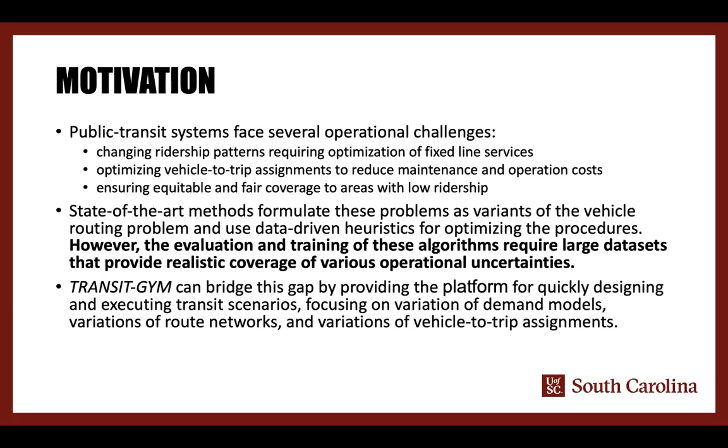We need the ability to design different demand scenarios and test the algorithms against changing demand and traffic patterns. However, there are several challenges. Scenario specification is one of the challenges we face. Different transit scenarios, such as different demand models, route networks, and vehicle-to-trip assignments should be designed in our platform so as to provide realistic coverage of various operational uncertainty for testing algorithms.

How to specify these scenarios in our platform and allow users to select and execute easily and automatically is the problem we focused on. To handle this problem, first, an integrated, highly scalable cloud backend for various transit scenarios is needed. Second, a domain-specific modeling language is used to create domain-specific models representing different scenarios.

Another challenge is the calibration of simulation models. For the simulator to remain viable, it is crucial to keep the physical transit network of the city and the simulated transit network in sync. It is common for developers and researchers to retrieve network files from existing platforms such as OpenStreetMap. The data available on these platforms is traditionally crowdsourced, and in many cases, it is not up to date with the actual transportation infrastructure.

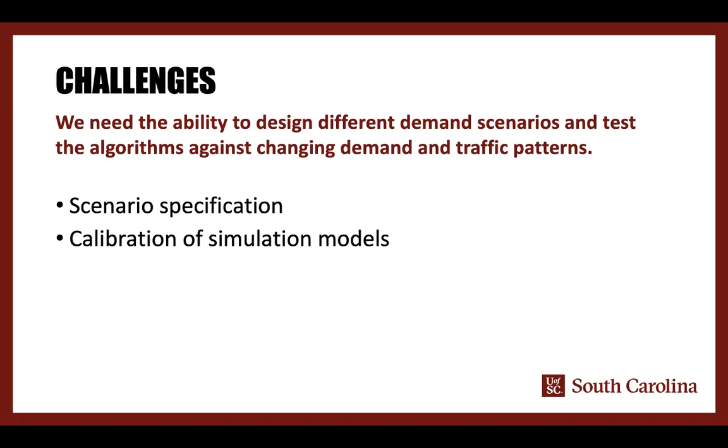The central contribution of this work is a domain-specific language and associated experimentation toolchain and infrastructure to enable subject matter experts to intuitively specify, simulate, and analyze large-scale transit scenarios and their parametric variations. The key contributions include a novel domain-specific language that allows intuitive specification and variation of transit scenarios, a methodology to construct and calibrate street maps that conform to real-world transportation infrastructure,

a toolchain that automatically configures simulations from the scenarios specified using the domain-specific language, and a customized general-purpose simulation for transit scenarios. Of particular significance is an integrated microscopic energy consumption model that also helps to analyze the energy cost of various transit decisions made by the transportation agency of a city.

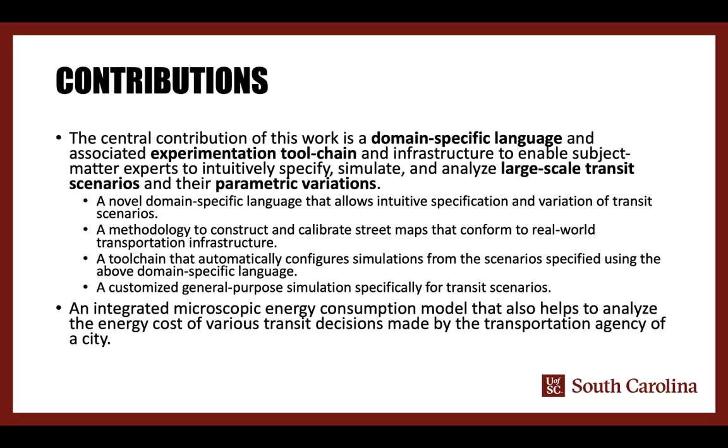This paper lies in the intersection of these techniques: model integrated computing, cyber physical systems wind tunnel, SUMO, and energy estimation models. Model integrated computing is a meta modeling technique that puts models at the center of all applications. It allows the creation of domain-specific modeling languages. In the rest of this presentation, I will call it in short DSML.

The DSML describes the syntax and the semantics of the models, how models can be constructed, and the constraints that the valid models must satisfy. The DSML tools then interpret models to verify them and generate executables.

Cyber physical systems wind tunnel is developed by Vanderbilt. It is a model-based heterogeneous simulation, integration, and experimentation framework. This framework has been successfully used in different application domains such as traffic, security, high fidelity dynamical simulation, and smart grid. We are working on extending Transit Gym using this framework for integrating traffic simulation in SUMO with transportation planning simulation and for large-scale scenario-based experimentation.

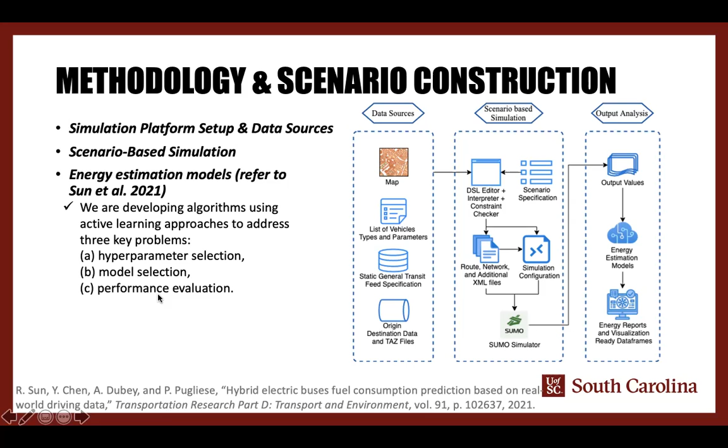This slide introduces the DSML we used in our Transit Gym. This DSML program is separated into the import section and configure section. The first section imports the pre-configured scenario settings that would be used as background data for subsequent code. The import command has 4 variants corresponding to each of the imports. For example, import network configures the map, import vehicle configures the vehicle type, import GTFS configures the GTFS data, and import TD configures transportation demand files. The next section configures one or more simulations based on user input parameters.

Here, first, the time range for the simulation will be specified. The schedule command then is used to configure the schedule to be simulated, like weekend or weekday. The output sampling period specifies the period for energy summary output. Finally, in the vehicle assignment block, vehicle-to-trip assignments can be defined. For example, we can simulate a scenario with 1 weekday traffic and 1 weekend traffic in Chattanooga before 12 p.m. and assign a specific vehicle type to all bus routes within block 101. This figure shows parts of the example program that constructs this scenario.

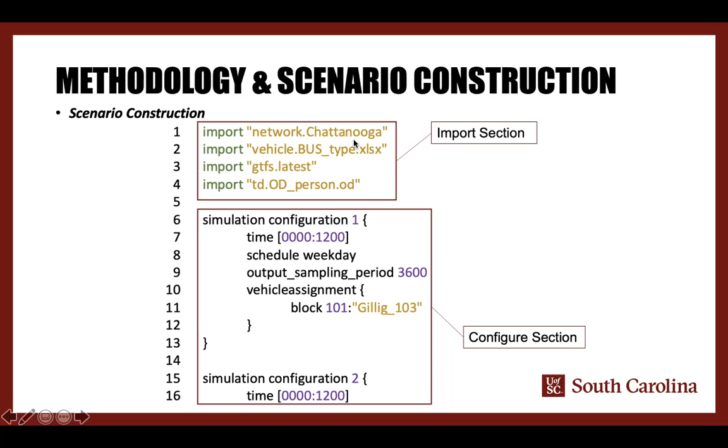This figure presents the detail of how bus mode is implemented in the simulation, demonstrating the interactions between the various components of SUMO. The key steps in the workflow are network refinement, TraCI bus stop location retrieving, bus trip generation, vehicle type definition, background daily traffic route generation, person trip generation, and bus and person integrated route generation. The DSML interpreter automates these steps, including calling SUMO packages and writing programs to generate SUMO essential input files, as well as other additional settings and arguments.

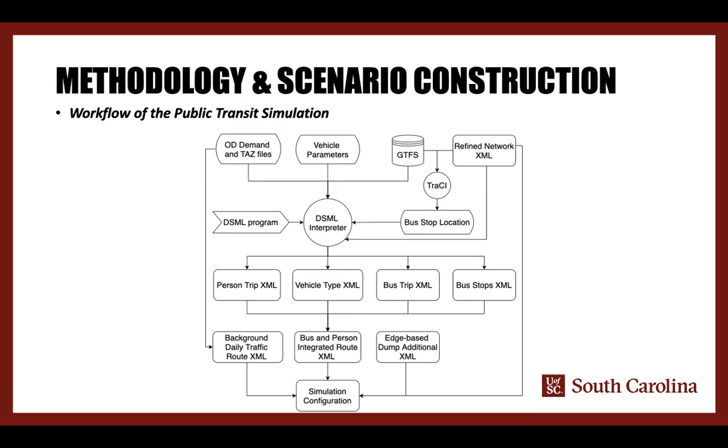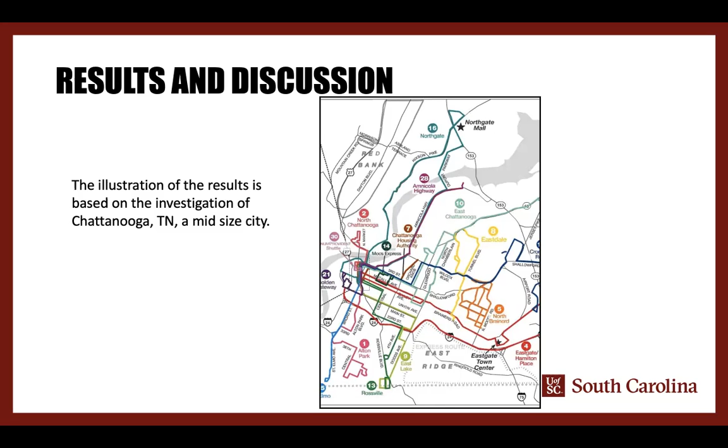The illustration of the results is based on the investigation of Chattanooga, Tennessee, a middle-sized city. The right figure shows the multimodal transit system in Chattanooga operated by CARTA. It contains 16 fixed routes, 3 neighborhood dial-a-ride demand-responsive routes, and a complementary paratransit service.

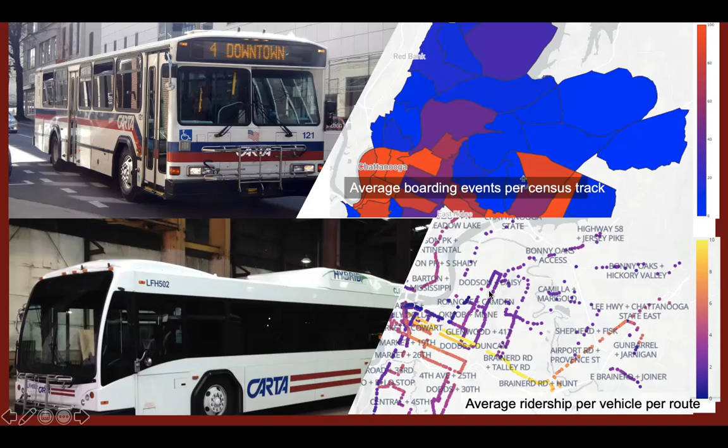This slide shows the average boarding events per census tract and average ridership per vehicle per route in the investigated Chattanooga region. Our platform can generate various visualization-ready data frames converted from output files, such as edge-based summary, vehicle trajectory, and bus stop information. It provides flexibility for users to select points of interest from these data frames and conduct specific analysis.

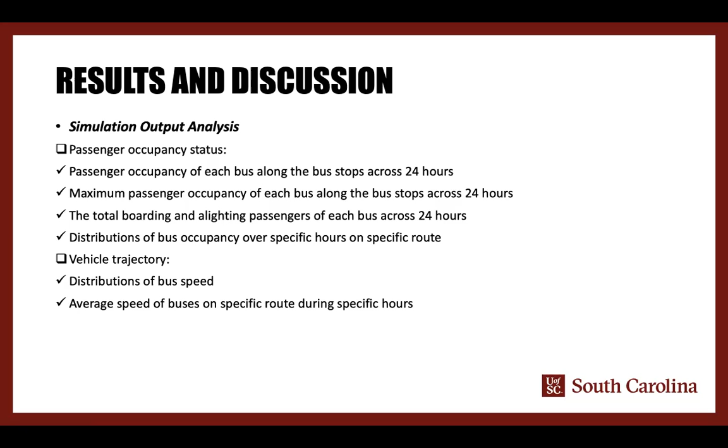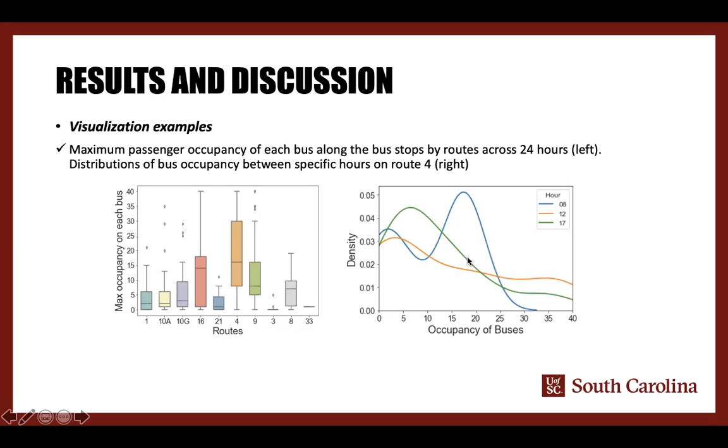To investigate the occupancy status during different times in a day, the distributions of bus occupancy between different specific hours on a specific route can be visualized, as shown in the right figure. The visualization function also can show the summarization of the total boarding and alighting passengers of each bus across a whole day by routes or by trips. See this figure. It can provide users intuitive passenger boarding and alighting status for designing and operating a regional mobility service dynamically.

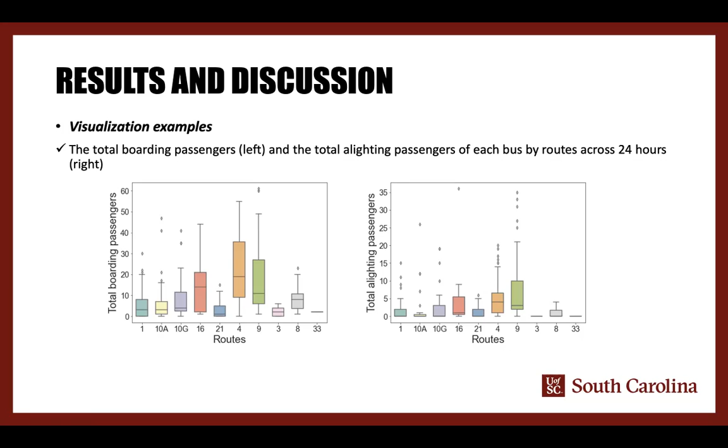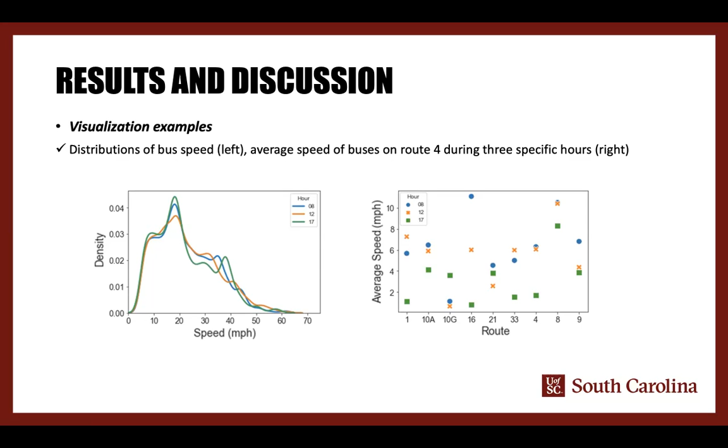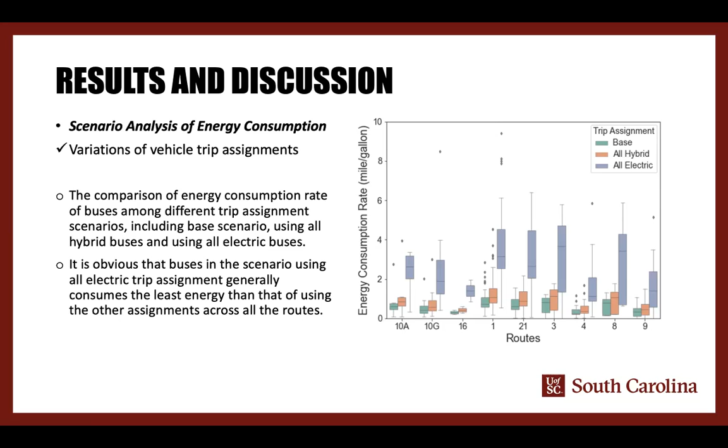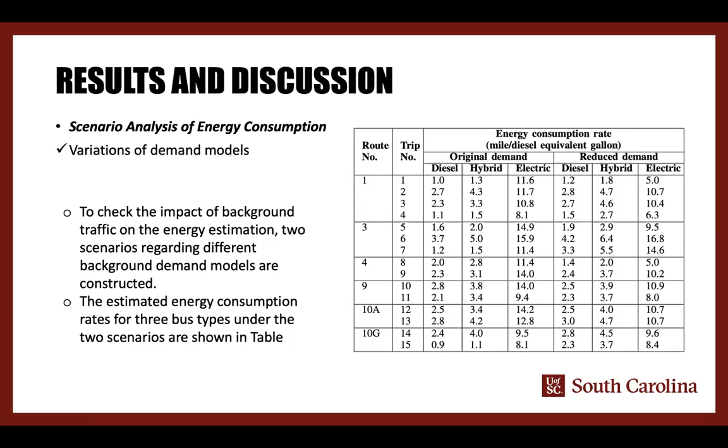For variation of demand models, to check the impacts of background traffic on the energy estimation, 2 scenarios regarding different background demand models are constructed. The first scenario presents the simulation with original daily background traffic, and the second scenario is the simulation with the daily background traffic reduced by 20%. These 2 scenarios are conducted within 1 peak hour simulation. As a simple illustration, the estimated energy consumption rates for 3 bus types under the 2 scenarios are shown in this table. This helps to analyze the energy cost of various transit decisions made by the transportation agency of a city.

In sum, we presented the platform TransitGym. It is an extension of a SUMO-based transit simulator for simulating a variety of transit scenarios. It provides the ability for rapid design and evaluation of what-if transit scenarios. Its domain-specific modeling language calibrates crowd-sourced street maps and traffic demand patterns for accurate testing and validation. Our experiment results demonstrate the broader feasibility of TransitGym for realistic transit simulation and providing efficient decision support for transportation planning. TransitGym is freely available on GitHub.

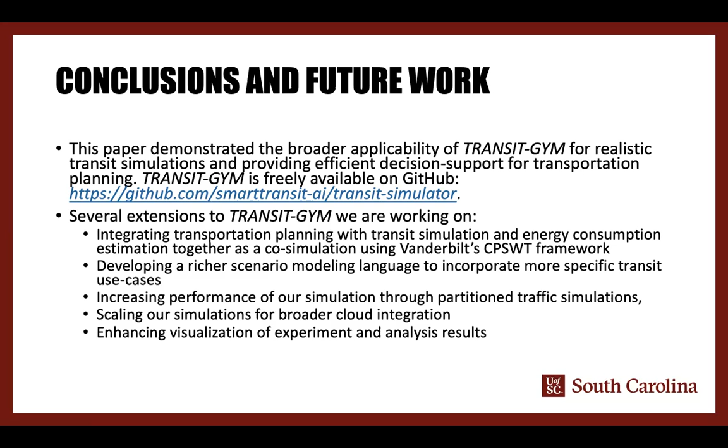We are currently working on several extensions to TransitGym, including integrating transportation planning with transit simulation and energy consumption estimation together as a co-simulation using Vanderbilt's cyber-physical systems framework; developing a richer scenario modeling language to incorporate more specific transit use cases; increasing performance of our simulations through partitioned traffic simulations; scaling our simulations for broader cloud integration; and enhancing visualization of experiment and analysis results.